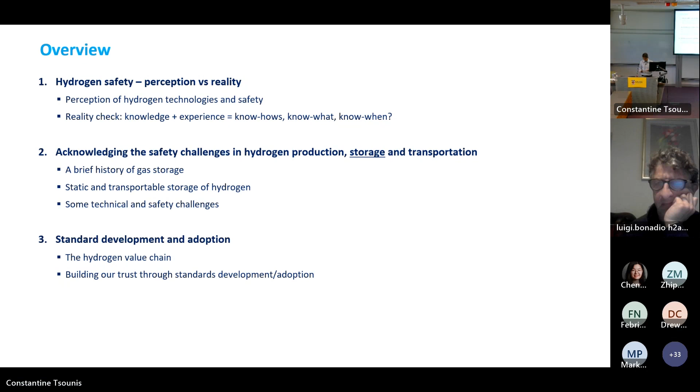Now, I know you guys are very experienced and have a lot of knowledge. Just to ensure you can listen to this presentation from start to end, I'll perhaps start with a quiz. Just 3 questions. You don't need to give me the answer, but think about the question and keep the answer for yourself. There will be no prize, but also no penalties.

Interesting enough, hydrogen on the periodic table, atomic number 1, is sometimes quite confusing and deceiving. In fact, what we learned, depending on which history book you read, it's not actually the first element discovered. Now the question is, how many elements were discovered before the discovery of hydrogen in 1766? As you can see on the screen, there are 3 answers.

Pick the one you think is right. Okay, now second question. There are 3 gases that, from current knowledge, we know have a negative Joule-Thomson effect at normal temperature and pressure conditions - hydrogen, helium, and what is the third one?

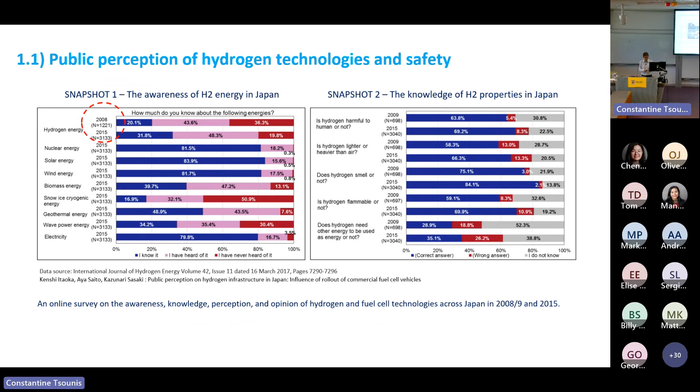As a start, part one is talking about the reality check. There's also another good paper by a Tasmanian university, looking at how to get the safety message across to the general public. In a nutshell, if you want to get something across, we need to consider the socio-political acceptance, community acceptance, and market acceptance. All combined together will get a clear message across.

In order to do that, government has a great role to play, which is to come up with solid regulations. From an industrial perspective, we also have a role to play, such as the code of practice, and don't forget international standards as well as Australian standards also have a big role to play as a balance. So I guess Standards Australia plays a very important role in that sense.

So that basically touches on the reality check. I guess to summarize part one.

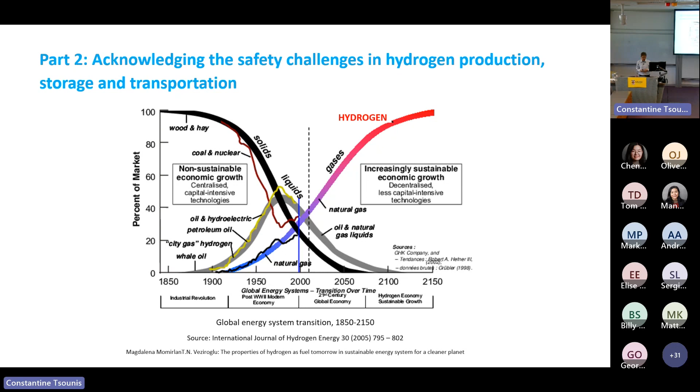As I said earlier, I'll briefly touch on storage and perhaps a little bit of transport fundamentals. If we're talking about hydrogen, production is a very key aspect of the whole supply chain or value chain. But storage is also a big part. When you have produced gases such as hydrogen, you need to store it somewhere, and then you need to store it in the right form for the right moment, for the right use.

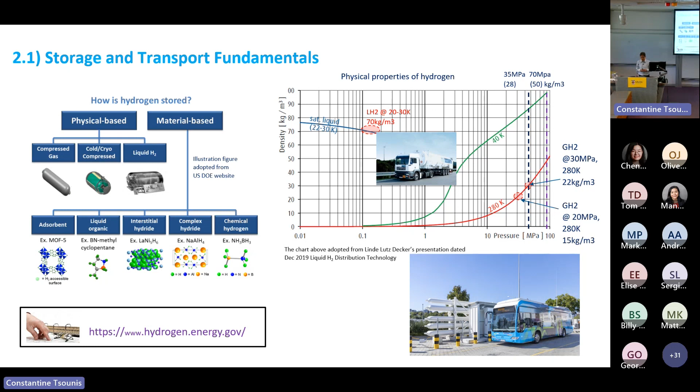Not everyone knows the history of gas cylinders or gas storage, so I thought I'd give you a very quick timeline of gas storage. This timeline is basically from my many discussions and correspondence with a former BOC technical authority based in England. Depending on which history book you read, picking a point like 1852, some people would consider this the close of the second phase of the industrial revolution in the UK. It sounds about right.

At that time, two gases were becoming more commonly used for the general public. One is oxygen, by thermal decomposition of barium oxide, used for medical purposes and a lot of other oxidation uses. The other gas at that time was acetylene.

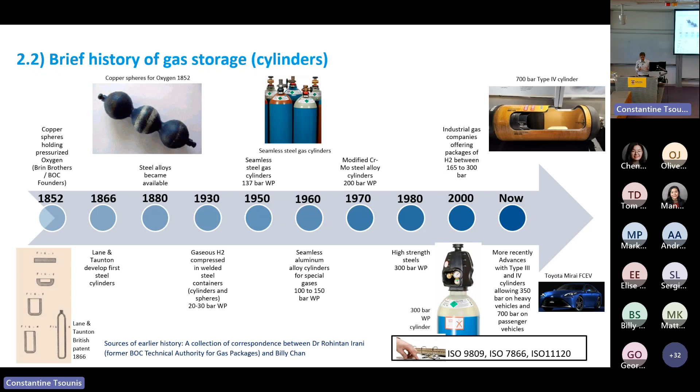As the timeline goes by, each development actually has its own story. I wouldn't bore you with this too much, but I just want to give you a sense that today's gas cylinder, in addition to what we call type 1 metallic formations, there are different types in circulation, which I'm going to show you in the next slide.

For those people working in hydrogen embrittlement, I think you'll appreciate what kind of metal and what kind of metal surface conditions make it less prone to hydrogen embrittlement.

Now type 4 is becoming more popular. When I say more popular, it comes down to the weight ratio - how much gas you can have in that container compared to the gross weight of the gas package.

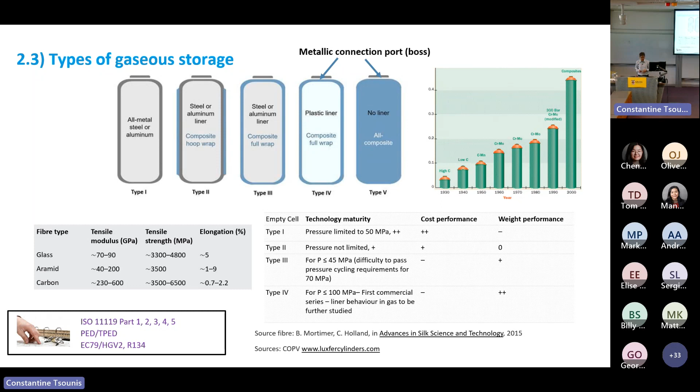There's also a very rough graph on the top right corner to give you a sense of, from the very early days, the ratio of gas to the gross weight of the gas package. Today, by looking at the graph, you can tell how advanced we are.

That probably gets down too deep, so I'll keep it brief. When we're talking about storage, it can be in the form of pure storage - so it can be storage in the backyard of the production, or storage in isolation, or storage somewhere else. So purely as storage.

But often the storage can be a static storage or buffer storage. If we come to that, you can still use the gas cylinder pathway as a buffer storage or static storage. But again, that's probably not as good as when you have design storage for a pressure vessel. I just want to give you a sense of how vast the Australian standards can be when you're referencing them for designing which path or pathway to go.

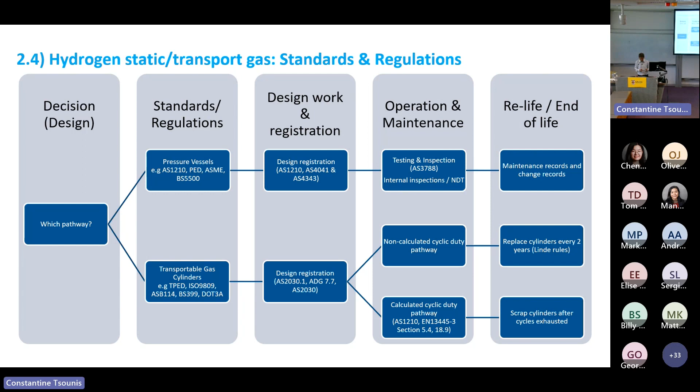A photo can tell a thousand words, so I'll just show you a few photos of static storage and transportable storage. And again, I'll give you a couple of references to Australian standards, such as the 2030 family and the AS1210 family.

All of these are associated with design registration, design, and how you maintain a cylinder according to the regulation. By the way, some Australian standards are actually written into the regulation, either in the WHS or OHS regulations. So when a standard is written into the regulation, it becomes part of the legislation or law. This is why it's so important that we get the standard right.

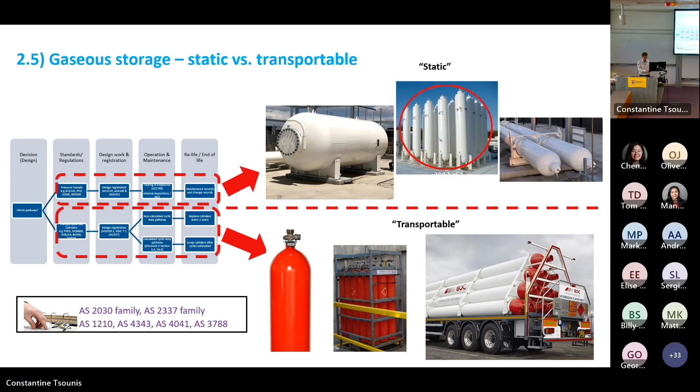Again, more photos, and perhaps this photo will give you a quick comparison of the benefits of liquid storage compared to gas storage. As a rule of thumb, we're talking about 4 times the footprint difference. But maintaining liquid storage requires, firstly, more energy intensive processes when you make the liquid, and keeping the liquid in storage also requires a lot more effort than gas storage, relatively. But again, just to give you a sense of the difference.

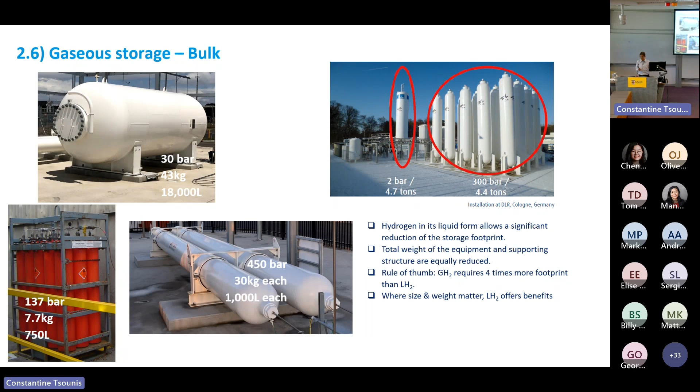Okay, I promise I'm not going to sell you anything, but just show you some photos. Now, in transportable applications, today some gas companies still use tube trailers, getting a large quantity of gas from A to B.

I think in a few years' time, you probably will see more often this sort of arrangement, MEGC, or multiple element gas container. They probably will mount the gas container vertically rather than horizontally, in different configurations, and you'll probably see more type 3 or type 4 in circulation.

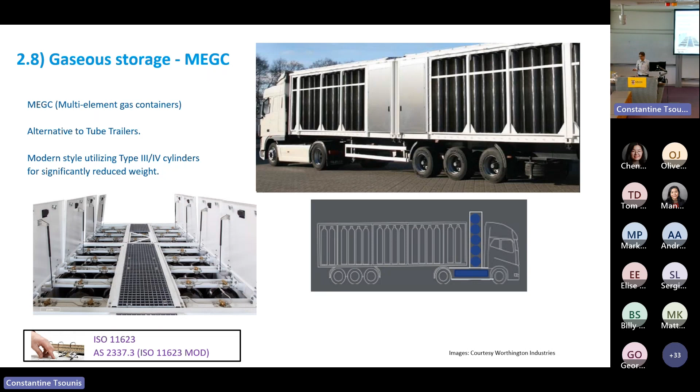I know quite a lot of people working in hydrogen embrittlement, from the industrial learning, it's not new, but it's not really old either. We started operating gas storage all the way back to last century. But a good understanding of hydrogen embrittlement, I'm not talking about in the academic area, I'm talking about in the industrial sense, we only learned that around the mid-70s when we were trying to charge more gas into a gas cylinder or gas tube. Unfortunately there were some fatal incidents at that time, and the more we dug into it, the more understanding we gained of hydrogen embrittlement.

I guess what we learned, I think some key learnings - the tightness. As we all know, hydrogen being the smallest molecule, it can actually slip through a very small passage. In addition, it can also absorb onto the metal, so it's quite easy.

As a gas storage, there's one part we often don't pay too much attention to. We understand the metallic characteristics related to hydrogen reasonably well, and I think it's potentially advanced compared to the time of learning in the 70s. But now sometimes the challenge is not the metallic, in fact it's the non-metallic - dealing with the O-ring, correcting the specification of the O-rings, the sizing of the material, the tolerance.

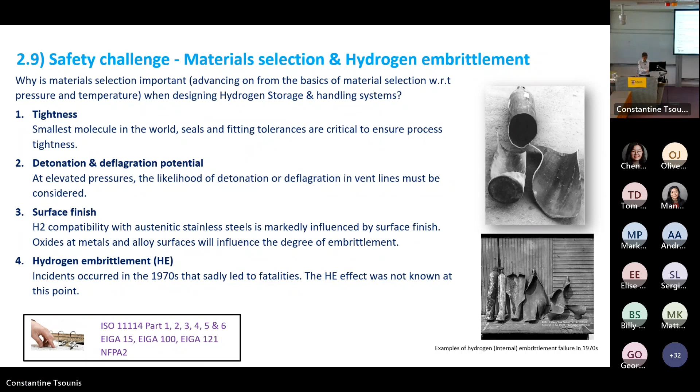Now, when we talk about safety, we talk about leak. I'm sure you're probably aware of this, the QRA.

If you have good detections, well, firstly, I think the better approach to hydrogen safety, or safety in general, is to focus on the preventive rather than the mitigative. But if considering a mitigative way, if we have a leak, it's better to have something to detect the leak. And if you can control and isolate it, then you're okay. Then nothing to worry about.

If the leak continues and is not detected in time and adequately, and if you have ignition sources around, that potentially will give you a jet fire. I have an example of the jet fire later on. I can show it to you.

If the leak is not detected or accumulates in a certain environment, potentially it can lead to an explosion if an ignition source is nearby or in the vicinity. Now, there are two photos on this slide.

One photo's basically telling you that hydrogen, or the vent, even at very low pressure - the gas doesn't like taking corners. The straightest distance, the easiest way to let it go, is the better way to go.

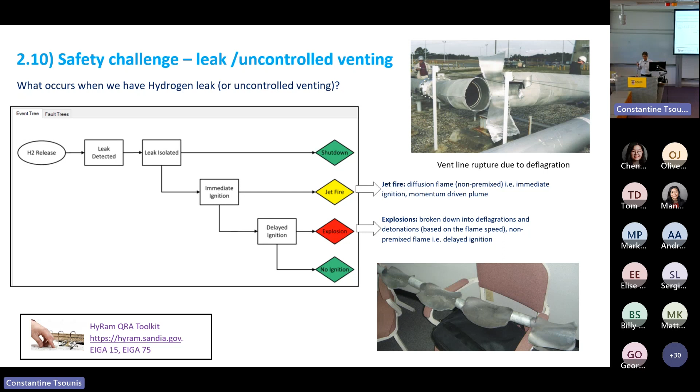This is a good deflagration. The deflagration didn't completely open up. It gives you a pattern like this. This is from a vent line.

You might not engage in a lot of venting design, but I just want to show you some examples. There's a number of ways to make it better, considering that in laboratory conditions you're not venting a lot and not very frequently, but on the industrial scale, or for venting at hydrogen refueling stations, all this needs to be taken into consideration.

And again, there's a reference at the bottom, from CGA 5.5, hydrogen vent systems. There's also an EIGA document I referred to earlier that gives good design guidelines for venting. For people who might be involved in hydrogen design, those are good materials to start with.

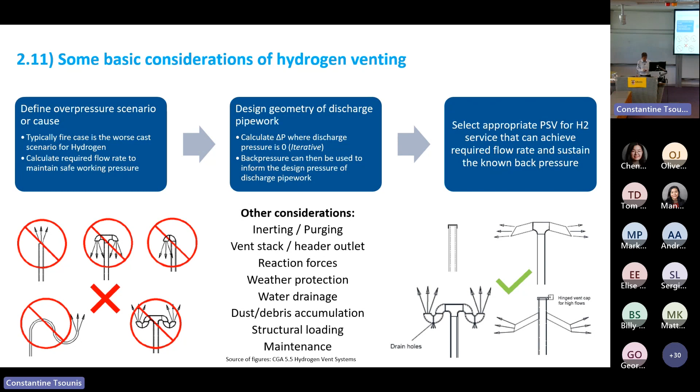Now, again, instead of putting up another airship Hindenburg photo, I think I'll just share with you 3 incidents. The first one - well, okay, let me start with hydrogen fire. I'm sure you've read from the literature that there's no question hydrogen flame is invisible.

But what do we mean by invisible? In fact, under daylight, it's hard to tell and hard to see. But if you have a dark background with less UV, as a background, you can actually see the hydrogen flame.

And I remember when I was a young engineer, building my first hydrogen plant, in 1993, as a young engineer, we received a lot of coaching from the experienced engineers. And at the point of commissioning the compressor, bringing the gas to 300 bar, and then passing it through a deoxo to treat the oxygen in the hydrogen.

I was given, I don't know whether we can still get it, a coconut broom, and a very experienced engineer passed that coconut broom to me and said, 'Yeah, this is what you need.' I didn't realize why until I experienced my first hydrogen flame on top of the deoxo. In fact, the deoxo is quite high, so when I walked closer to it, I felt a bit of rain, a bit of droplets on my head. That, in fact, was the product of the hydrogen flame.

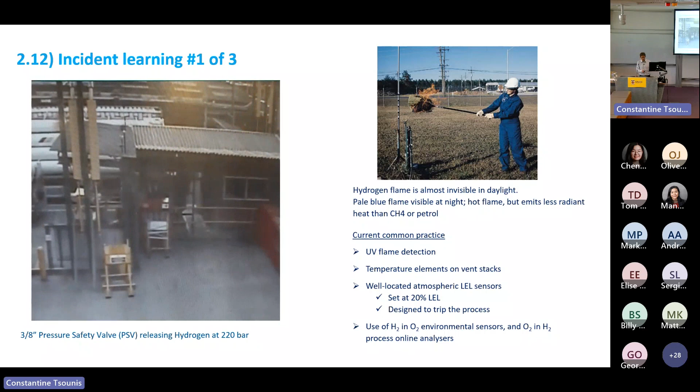Yeah, again, there's quite a number of common practices, I don't think I need to go through one by one. Excuse me, the other very common one I'll share with you, I probably mix up the numbers, but anyway, common causes of leak or uncontrolled release of hydrogen.

Whether on the hydrogen cylinder pack or on the tube trailer, there are commonly two types of safety relief: one is the burst disc, and some rely on the fusible plug. Those need to be maintained in very good form. If not maintained well, it potentially can give you a good leak point.

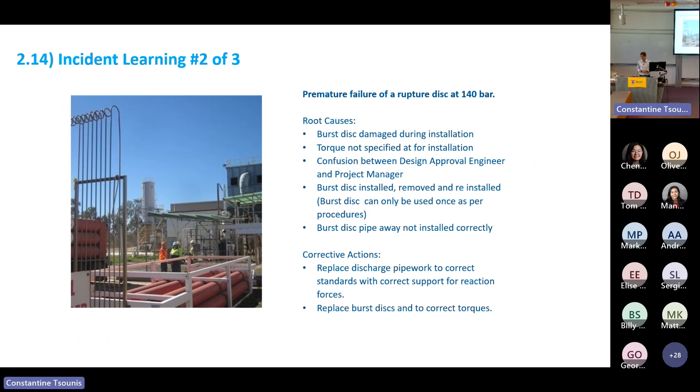I don't know whether you've come across or are aware of this, but there was an incident in Norway, not too far away from Oslo. There was, I can't remember, the first or second hydrogen refueling station. Luckily it was not in a very busy area.

But what happened was they had a large water capacity storage, and there was a leak coming out from one storage, leading to a jet fire. Because it was a big storage, the gas passed through a very tiny passage, creating quite a bit of heat, and then the heat was sufficient to create an ignition point, and at that time generated a jet fire.

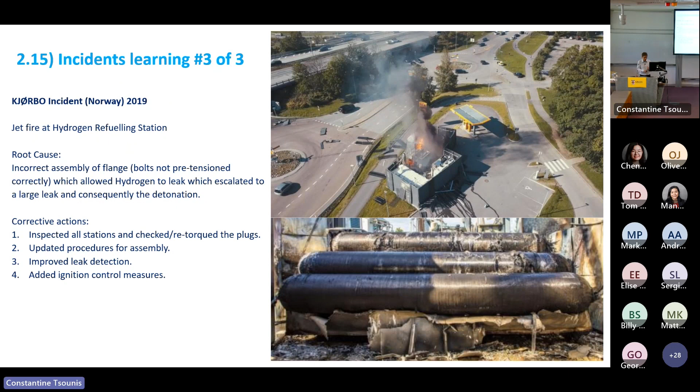Okay, now so far there's been a lot of communication going on after the jet fire, but I guess in a very simple way to describe what we learned from industry: those tubes, because they want to allow a bigger passage for the hydrogen to go in and come out.

So they create what they call a double flange arrangement. What happened was when people specified the outer flange, which was supposed to be held by two, well, more than two, symbolically two bolts and screws, they actually got multiple screws, I think something like 24.

The designer or installer forgot about the nominated torque, so when they torqued it up, it was not torqued to the right strength or the right torque. So when you use the gas more often, more frequently, letting the gas in and out, it becomes a loose point, and it becomes bigger and bigger, and the gas actually leaks through between the inner flange and the outer flange.

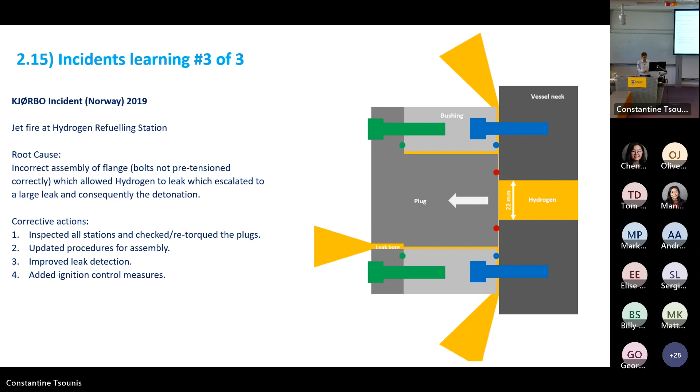That probably summarizes my second part, which is the gas storage. Now, there's a lot about gas storage, not just hydrogen gas. I mean for other gases too, what we learned is there are good standards, whether ISO or Australian standards, they're good reference material available.

So before you start, before you work on a process flow diagram or process flow sheet, or before you get through every stage of the project, no matter how small - lab scale, pilot scale, or even big scale - the good way is to look up any relevant Australian standard or international standard, look up any good code of practice, and also cross-check. When you're down to the risk assessment process, you need to cross-check all the regulations. So there's no one way to do a good project, but as a starting point, Australian standard or ISO standard are good reference material.

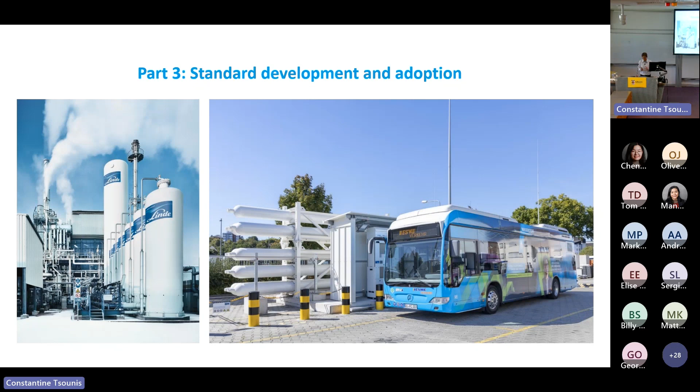Now, my last part, standard development and adoption. I'll probably keep it very short, and I know that John will already be lined up to bring you guys all the bolts and nuts of standard development. Just to give you the sense of why standards, whether Australian standard or ISO standard, are very important.

When we're talking about the hydrogen value chain, you can see the big picture, from production, processing, distribution and storage, down to the applications and end use. The end use isn't just industrial users - it can be blending hydrogen or using 100% hydrogen as fuel gas, strongly associated with the domestic environment. So the end user can be like mums and dads working in the kitchen.

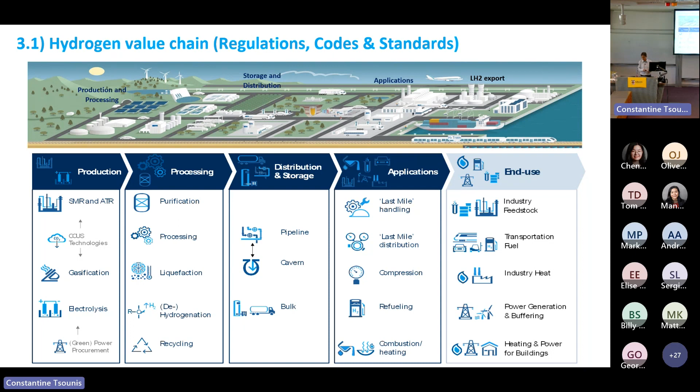So all this covers a very big, wide spectrum of different users, and standards can play a very big part in keeping us - when I say us, I mean including the community - safe.

I've been serving on two technical committees, as well as other committees in the gas association. One committee, also very closely associated with John, is the ME93. We have our chair, chairing the committee as well as the working group, getting down to the next level of work - for example, developing the Australian standard or adoption of the ISO standard, IEC standard. I'll mention a bit later on.

We divided ourselves into 5 working groups. I am serving as convener of the working group for production, storage, and handling. There are 4 other people looking after each working group. As you can appreciate, we have quite a big portfolio, and in addition to general health and safety matters, there's a whole lot of other things.

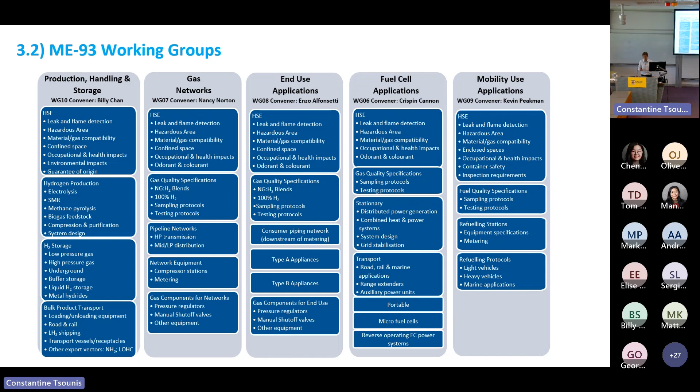I think John will talk about the ME93 - it's already been operating for almost 3 years, and since last year there's been a refresh, trying to get the particular working group people more focused on the portfolio or development.

There are plenty of reasons why we need a strong working group and committee for ME93. We are a little bit behind our peers in Japan, Korea, and a little bit behind the Europeans as well as North America.

This is about the liquid - preparing ourselves to have the adequate loading arm. For example, when we ship LNG or LPG from a big ship onshore and offshore, one important part is the loading arm as a transfer.

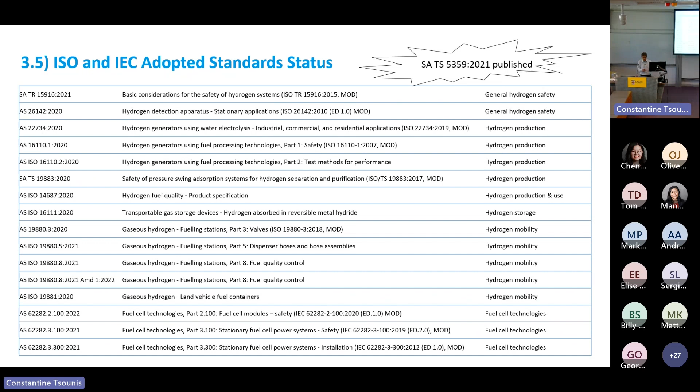Now, when I put this together, it's a little bit old because there are more publications going on. So just to give you a feel of the publication through the ME93 so far.

And John is one of the people in our engine room. Okay, I think I've finished my three parts. I'll be happy to take some questions later on after John. Again, there's no prize, but there's also no penalty. Looking at your faces, I can probably tell who got it all right. I think you all did very well. Thank you very much.

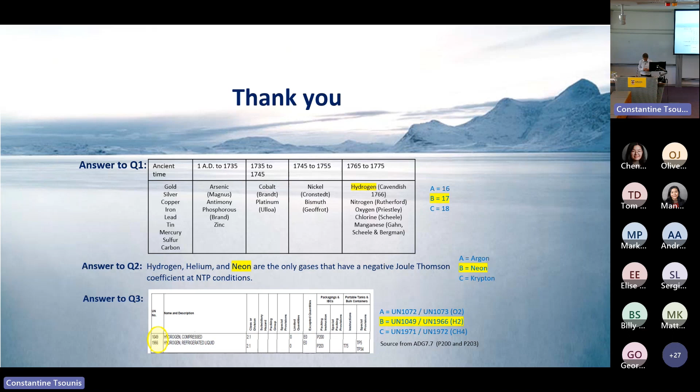Very similar to Billy, it was incredible being able to walk around some of the laboratories this morning. You'll work out very quickly that I am not a technical expert in hydrogen - I was the kid walking around the laboratories and had to put my hands in my pockets so as not to touch everything. So yes, thank you very much for allowing me to speak today. As I say, it's very nice to speak after Billy, because we get the technical, clever stuff out of the way first, and I'm able to talk to you about the much more general things we do in this space. So I'm going to talk a little bit about who we are, what we do, and how we put our work together.

As Billy has already alluded to, our work is international, and unfortunately - no apologies from me - a shameless plug on one of our key projects we call NextGen.

So yes, the world of standards. What are standards? Standards are published documents setting out specifications and procedures designed to ensure products, services, and systems are safe, reliable, and consistently perform the way they were intended to. They establish a common language that defines quality and safety criteria. They are practical and set achievable goals based on sound industrial, scientific, and customer experience. We try to ensure they are regularly reviewed to keep pace with advances in technology. As I say, from the screen here, we have found examples of standards going back to 1750 BC.

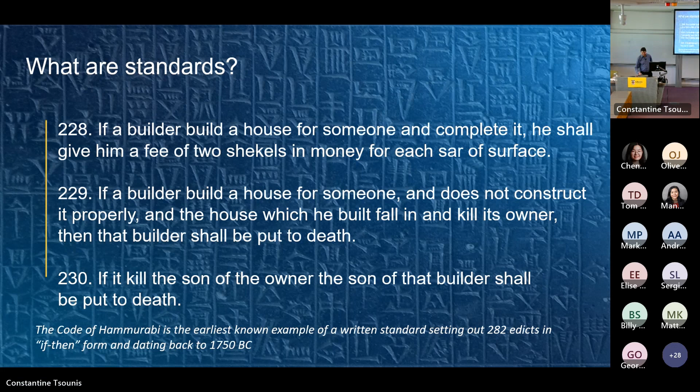So Standards Australia, bringing it forward to modern day - our story actually begins back in 1922. The first Australian standard was developed to govern the 6 million rivets you find on the Sydney Harbour Bridge. So every time that bridge is used, it is Australian standards keeping everybody safe. We are an independent, not-for-profit organisation recognised by the Australian government as the peak standards body in Australia, and obviously representing Australia at ISO and IEC level.

Whilst I'm very happy to talk about our traditional history, we do want to look forward and promote the growth of new industries, to support the development of safe and secure environments that create market confidence in new and established technical fields such as circular economy, smart energy, and of course hydrogen. Last year in October we turned 100 years old, and in celebrating this milestone, it's important to remember and recognise the contribution and efforts of our many members, contributors, and stakeholders.

So yes, we've come a long way since 1750 BC. Standards are increasing in complexity - we have many standards that reach over 600 pages long, including one of our most popular standards, the wiring rules, which in its next iteration is only going to get more complex. In our recent Iconic Nation report, available on our website, our research shows that over the next 10 years an estimated 4,000 new standards will be needed to strengthen Australia's economy, protect our nation from cyber attacks, mitigate the impact of natural disasters, and transition from traditional energy sources to renewables like hydrogen.

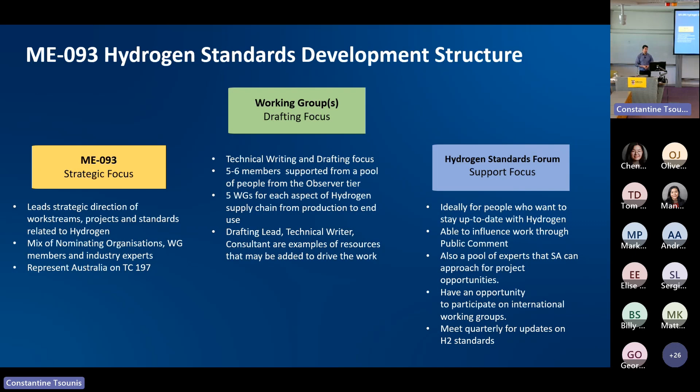So I'd like to spend a couple of minutes talking about how we participate internationally. I do want to respect everybody's time, and I know we're coming up to the end, so I'll try and move these fairly quickly. It is always our preference to adopt international standards, so much of what we do in Australia is influenced by the rest of the world.

We have the ability to become a hydrogen superpower. As Billy identified, we have the unique opportunity to be able to export to so much of the world, and because of that, there is very little point in writing Australian-only standards that could not be interpreted and used by the rest of the world. Interoperability is crucial to ensuring that global systems work, and that we have coherence across the world in areas such as technology, security, safety, and of course specifically hydrogen.

So a little bit of the Australian context. As I say, international standards are always our first choice. The World Trade Organization's technical barriers to trade has 6 principles for the development of international standards. These are transparency, openness, impartiality and consensus, effectiveness, relevance, and coherence. And to make sure that any standard that we produce can be useful for the rest of the world.